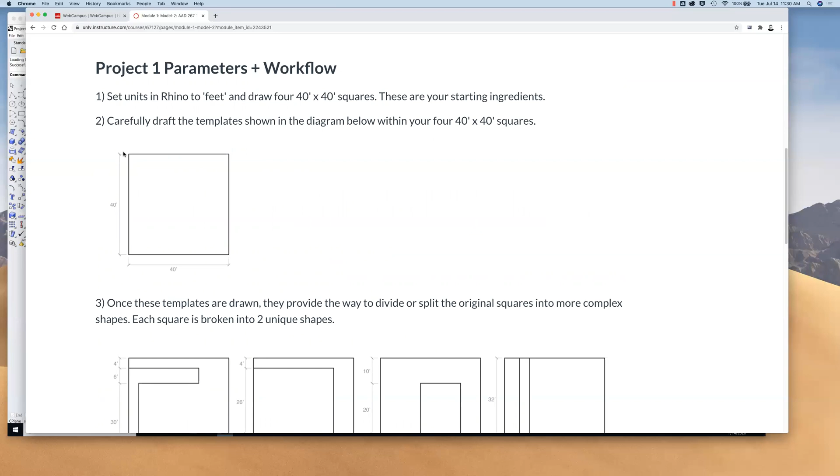First, you're going to set your units in Rhino to feet. You're going to draw 40 by 40 foot squares. Okay, so we'll start with 2 dimensions, so we'll start to draw things. You're going to take 4 of these 40 by 40 squares, and you're going to start to draw the stuff inside, right? Okay, and so you've provided these templates that you just need to sort of make something that's 4 feet in, and then goes, let's see, 32 feet this direction, and then 26 feet in that direction, okay? And on and on and on, right?

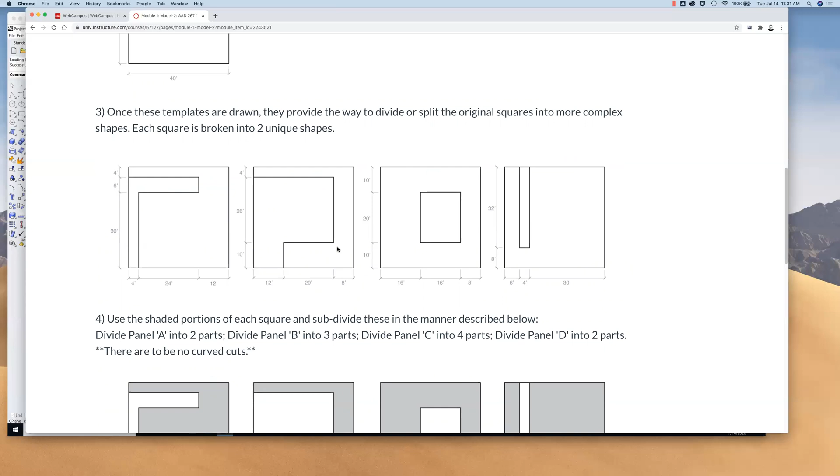What you're doing is you're taking something like a 40 foot by 40 foot square, and you're subdividing it into pieces. And then you're taking some of those pieces and further subdividing them. This piece gets cut into 2 additional pieces. This piece gets cut into 3. This piece gets into 4, okay? And on and on and on. Eventually, you end up with 15 unique parts, okay? A component catalog, so to say.

We will then extrude them into solids to give them thickness, so they're not paper thin. Let's say they're about a foot in depth. Then you can reassemble the parts in order to create a sort of spatial composition out of planes.

So there's a set of parameters here. You reassemble at least 12 of the components that you just drew and modeled, and arrange them within a 60 foot by 60 foot by 60 foot cubic envelope. So at least 3 edges need to be defined. You need to have some parts of one or more of these components go out to at least 3 of the edges of this imagined cube.

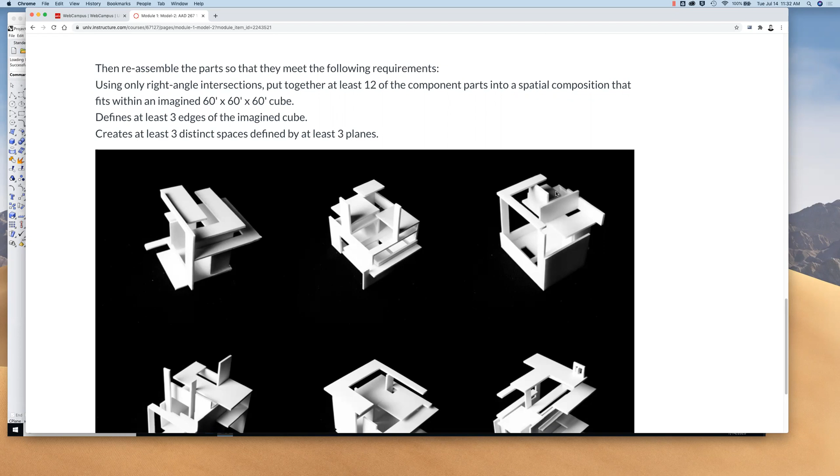And then you need to create at least 3 distinct spaces in this composition. That's easy - there's one here, one here, one here. What I hope you understand is that you don't necessarily need to create spaces by just making a closed room and then punching a hole through it for the door. You can begin to achieve spaces that flow into each other, understanding that there's an interlocking of spaces that can occur.

And if you have a variation in the set of volumes that are defined by these planar components, then you actually get some really interesting things that we'll cut in section and plan, and look at in perspective later on in the semester.

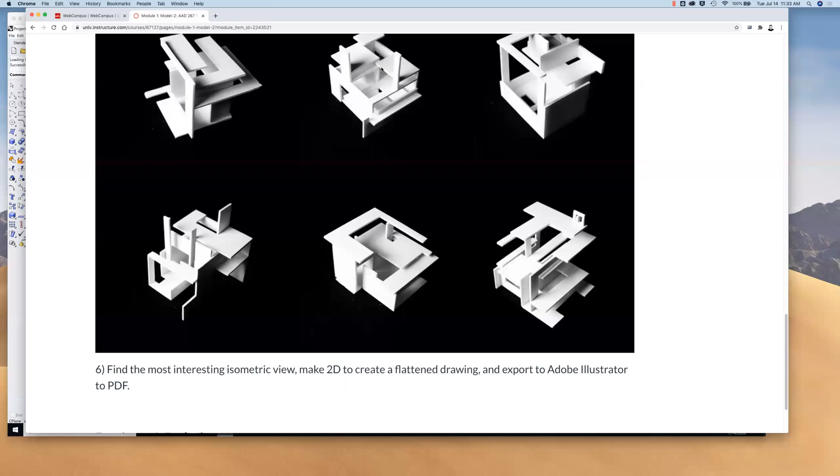So find the most interesting isometric view, then make it 2D and create a flattened drawing, and export to Illustrator to PDF. You'll be rotating this, looking around at it, and understanding what's the most interesting view that you're going to make an isometric drawing of.

Let's talk about quickly how we'll assess these - the criteria by which you can say, okay, I'm done, this is really successful, or maybe I need to work on this when I turn it in. We're talking about spatial variety: investigate and create a variety of volumes and interlocking spaces, which I just talked about.

So the interesting thing is, if you're looking at this and you say, okay, I don't just want a bunch of rooms, but I want a sort of set of interlocking volumes created by a set of interlocking planes.

Formal interest - the shape of things, the overall form created. Do not think in terms of front or back or top or bottom, but rather your model planar composition should be interesting from all sides. So if I took this digital model and turned it over and spun it around, it shouldn't be obvious which part's the bottom, which part's the back that I should never see.

Every side should be interesting. That might help you push, pull, arrange, slide, move, copy, or whatever, in order to continue to further compose these components into a system.

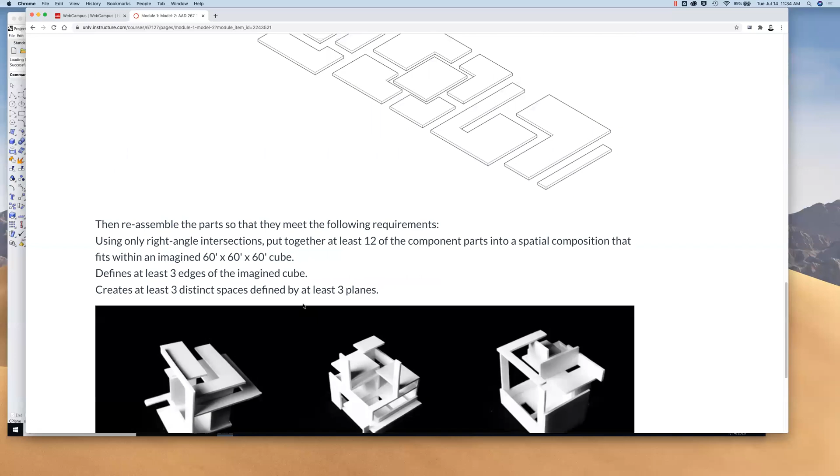And then last, simply following the instructions - making sure you read them carefully and that you follow them, that you meet the parameters, say the 60 by 60 by 60 cube. If this thing looks like a flat pancake and it's way outside of 60 by 60 feet, then clearly you didn't read very thoroughly. If it's just one big volume made on the outside, then again, that's not going to create 3 distinct spaces.

If you have curves, that's not part of the requirements - remember, it says here, no curved cuts. So look at these carefully. I try to break it down in a very reductive way, so you can just say step 1, step 2, step 3, step 4. Just follow the steps. The key thing is you don't necessarily have the end goal in mind, but the overall model emerges as you begin this exercise of how to compose planes in some sort of way.

So I have a question for Maria.

Will we have classes in person? Yes, most of the time we'll have classes - no, not in person, over Zoom. Campus isn't even open yet. So yeah, we'll be doing Zoom classes.

Did that answer your question, Maria? Is that what you were asking? Yeah, okay, great. Honestly, the last thing I want is to go into a classroom and touch a public computer that everybody else has touched, and those keyboards are petri dishes.

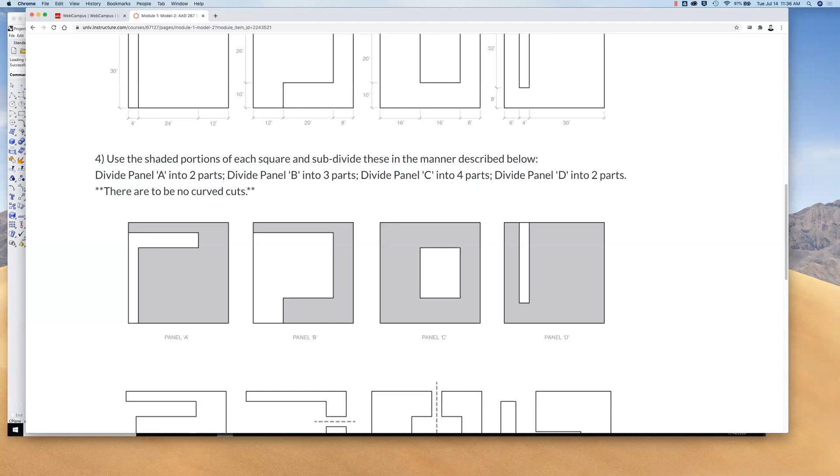I have a quick question. So in terms of drawing the shapes on the two-dimensional squares, are we drawing our own shapes with the respective dimensions, or can we draw it with our own dimensions?

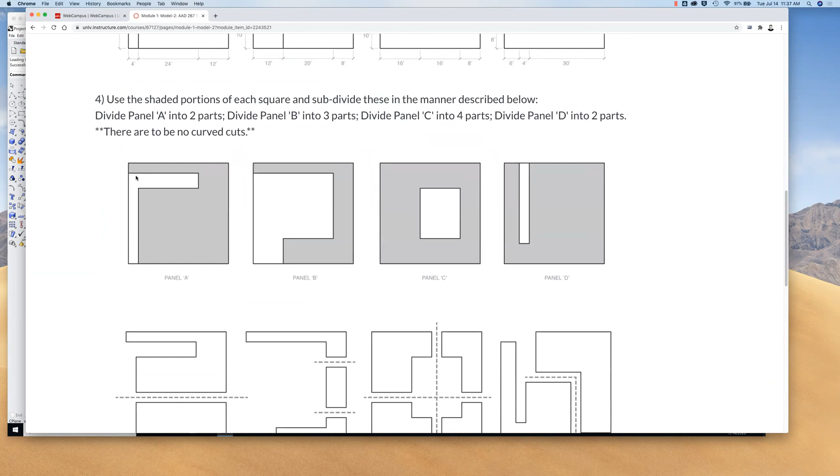You'll start by drawing, like in step 3, following these dimensions. So you'll have a set of shapes that look like this at the beginning of step 4. The shaded areas, then you can pick where you cut panel A into 2 additional pieces, where you cut panel B into 3 additional pieces.

So yes and no, right? No and then yes, I guess. Does that help? And what I'll do, sort of.

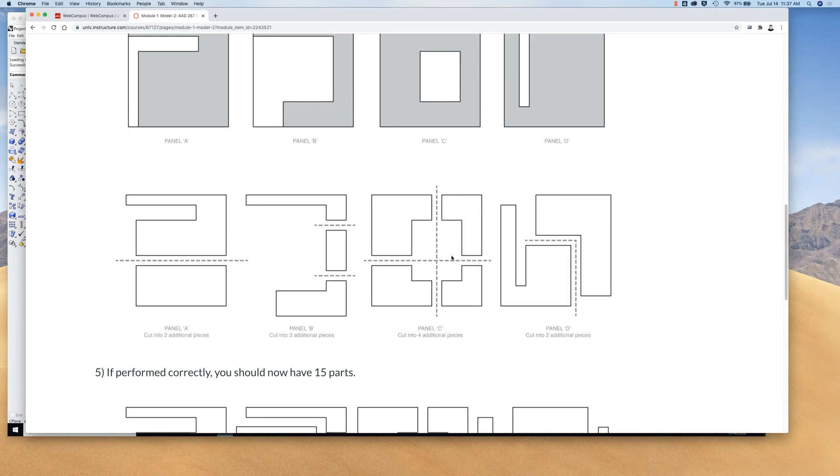Yeah, I mean, so we're basically making the shapes as you have them in the shaded version, correct? The very first step, okay.

Then the next step, where you cut them into 2 additional pieces, that's for you to decide where you would cut, right? It could be in this direction, or it could be here instead of down here.

Okay, thank you. Will the ISO be 30-30? Yes, the ISO will be 30-30. I'll actually show you in this demonstration how you set that in Rhino. There's a very particular way you do that.

So are we all going to have the same shapes and sizes? You'll all have these same shapes here, and then you'll choose where you cut 2, 3, 4, 2 additional pieces. So your overall component catalog might look a little different, although you're all starting with the same sort of language, right? These are all results from the same steps you're doing up here.

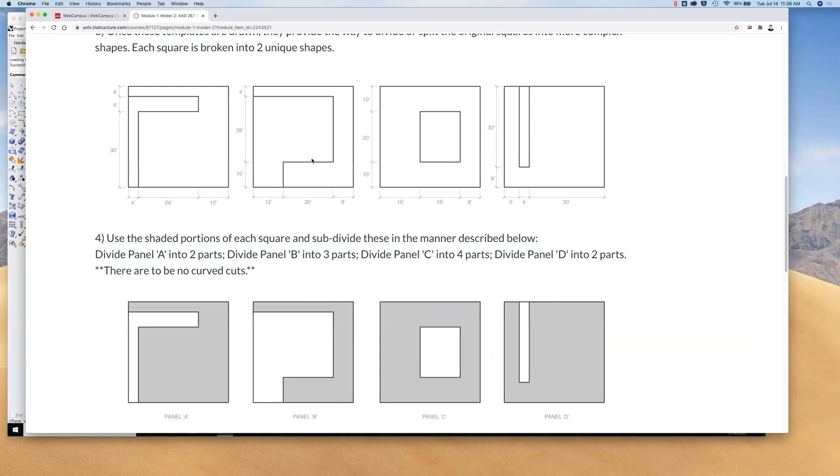They're all different, although they all have a similarity in the language used, and that they're planar shapes. Everything's orthogonal, everything's cut to 90 degrees, everything's put together in 90-degree increments. So there's a similarity, and yet each one is unique. You can think of it in that way.

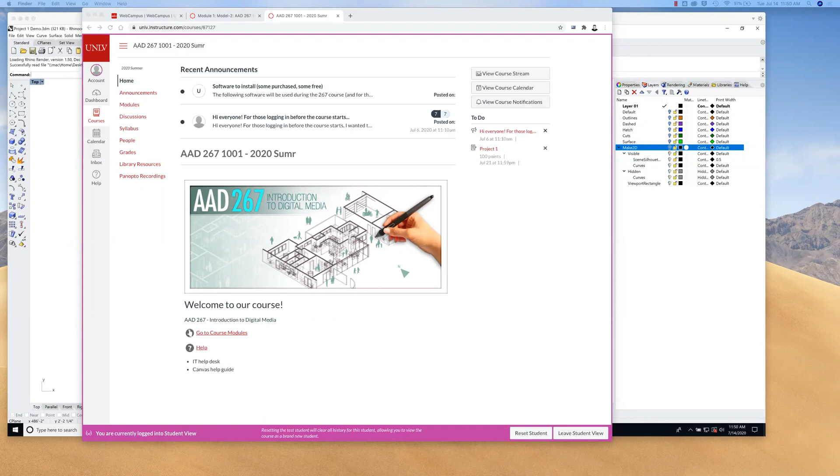Any other questions before we move on to Rhino? Oh, yeah, okay. So yeah. I just have one question.

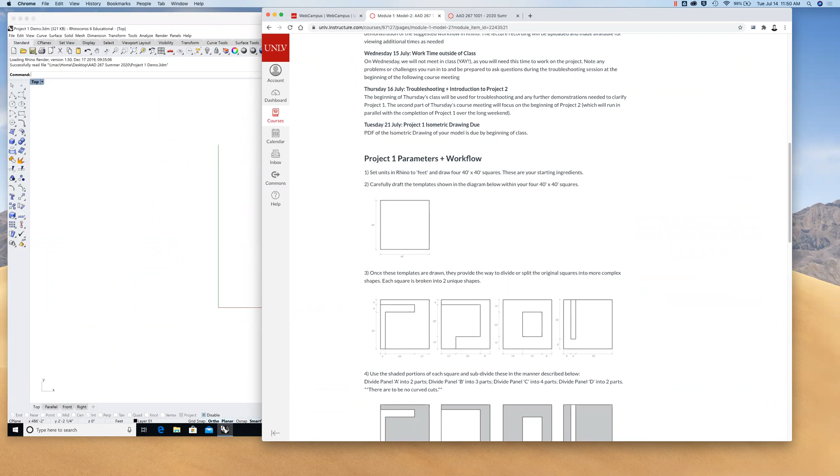Okay, so we'll just go through this step by step. First thing, Rhino, I'm just opening this up. Yours might look different. I've set my background to be white instead of the gray. I've turned the grid off because I don't like it. It's visually distracting, particularly when I'm trying to show things on the screen. But all in all, this should be the exact same.

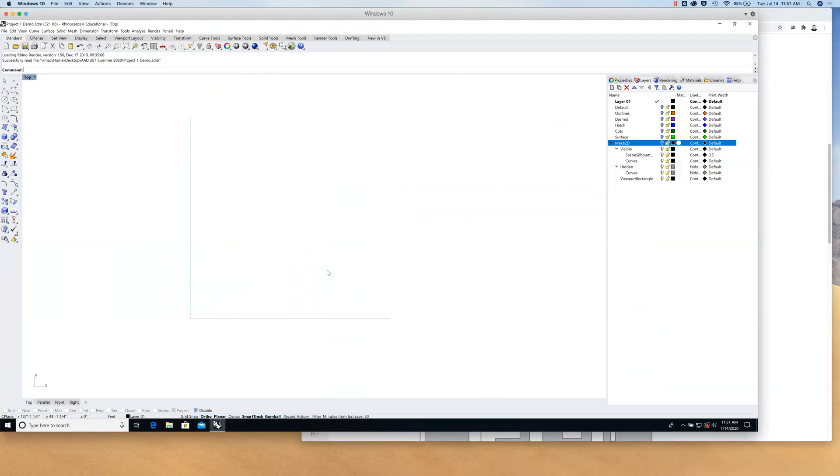So one thing we need to do is set our units. That's something you just need to get in the habit of doing, so that's the first thing we're going to do. We're going to go to some of the settings. This is where most of Rhino's settings are if you're using the Windows version. You go to Tools, pull down, and go to Options down at the bottom of that pull down. Okay, leave my cursor there for a moment. If you write something down, the settings are Tools, pull down, Options.

And that'll bring up a settings box, and there's lots of things in here. Here's how I turned off my grid: I went to the grid settings and unchecked show grid lines. And on and on and on. But what I can do is go to units, and make sure those are set to feet.

Also with distance display, you can do decimal if you prefer. I prefer feet and inches. Sometimes I want to say, hey, this is going to be 8 foot 4 inches. I don't want to say 8 foot 0.33 feet or something like that, that would just be weird. In the imperial system, things aren't necessarily always divisible by 12 really easily in my head, so feet and inches work well. So this is what I'm using right now: feet, and for distance display, feet and inches.

I'm hitting OK. So we've set units. That's really important—we typically draw and model things at full scale. Then if we need to extract, let's say, an 8 scale drawing, we can extract it and make sure it's scaled correctly. Typically, we just draw something that's 40 feet, drawing it at full scale in the modeling space itself.

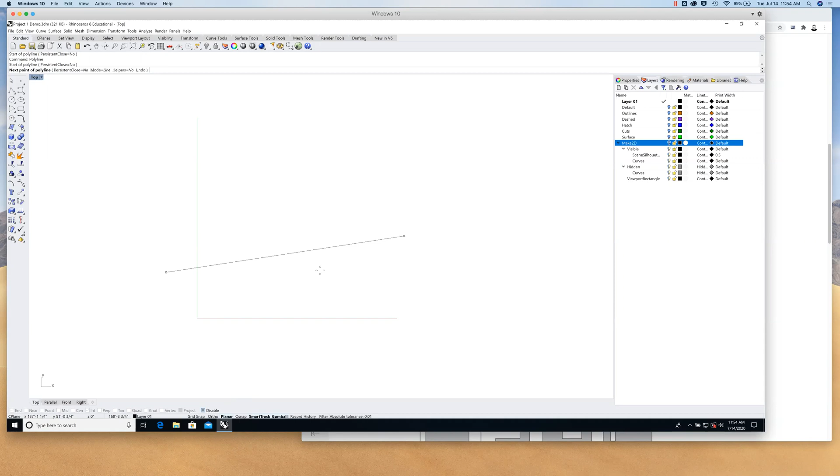I'm just going to start by clicking on a point. Let's draw a line—a 40-foot long line. Now it wants me to draw the end, or click on the end point. I can actually type in 40 and then the tick mark for feet. Now it's only going to let me draw a 40-foot line.

Now I want to actually just draw in the x-axis. I want to constrain these to 90-degree increments, so I can turn on ortho down here at the bottom. There are a couple of options I can toggle on and off, and one of them is ortho. What happens when I toggle ortho on? I can only draw on the x or y axis. Okay, so I can click.

Now I have a 40-foot line going from left to right. Now it's asking which direction I want to draw. I can click my mouse button, or type in 40 with a tick mark for feet. Now I'm going to draw another 40-foot line—I just have to tell it which direction. I'm entering 40 feet into the command line, hitting enter. Now I can only draw a 40-foot line; it's just a matter of clicking which direction I want.

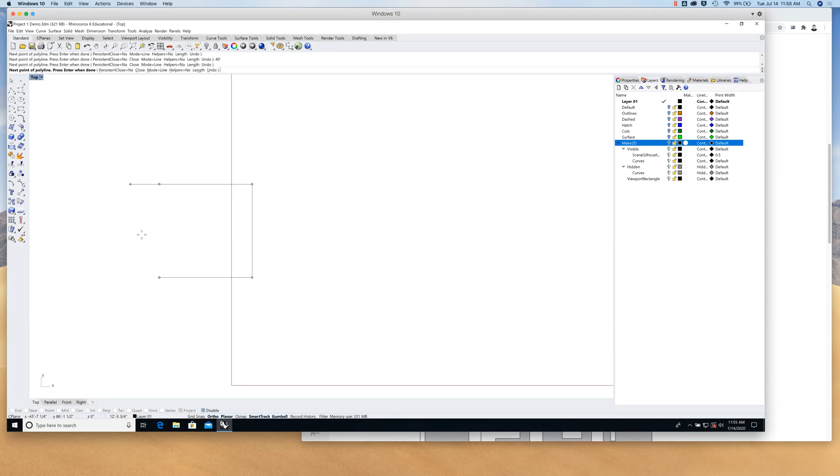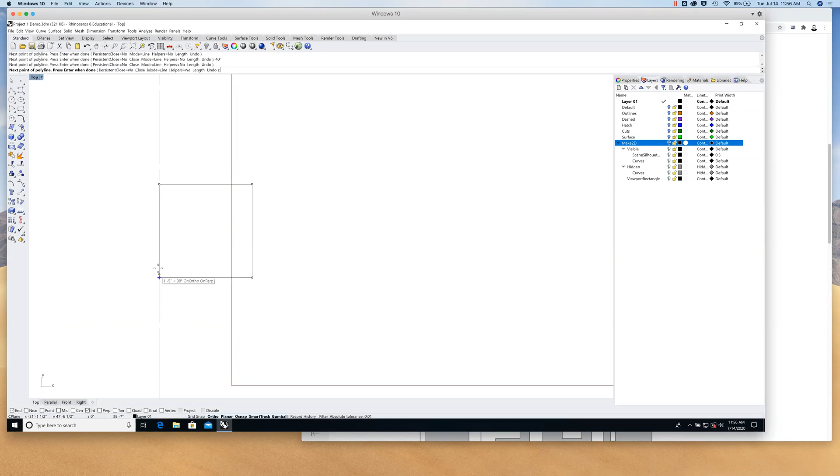Now I could type in 40 feet and just click down, or let's say I just want to make sure I click directly on that starting point—I'm going to turn on my object snaps. That's another option down there at the bottom. So I've toggled on ortho, so I can only draw in 90-degree increments, and now I've also toggled on object snaps, so I can make sure I snap to endpoints. Now when I get close to that endpoint, it'll snap to it and I can click and close the shape. So I'm going to draw another 40-foot box—I'll start again.

Polyline, start point. Remember, if I don't have my ortho on, I can draw in any direction I want. I'm going to turn my ortho on since I'm just drawing squares. I'll type in 40 feet into the command line using my keyboard, hit enter, click when I want to place that endpoint. 40 feet, click, 40 feet, click, snap back to the start point.

Now, you'll do this over and over again a couple of times in order to practice and develop the muscle memory. What you'll find is that when you right-click, it's like hitting the enter button. When you right-click and you don't have a command going, it repeats the last command, which is really handy. So let's say I want to draw another polyline.

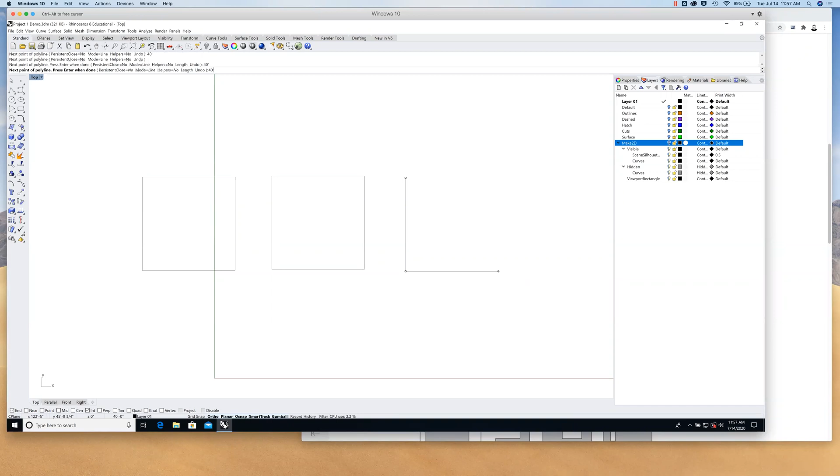I just right-click again. I don't have to go all the way back to this toolbar button. Right-click again, 40 feet, click, 40 feet, click, 40 feet, click, snap to that endpoint, click. Right-click to start again.

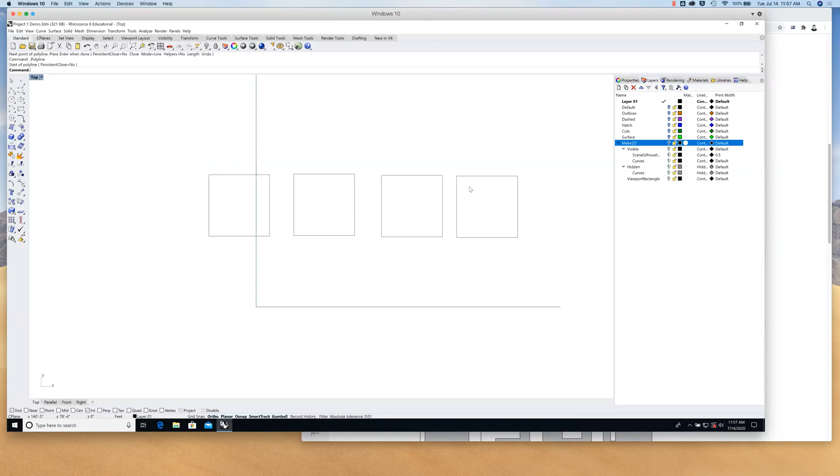40 feet. So it just takes practice, practice, practice, practice. And you eventually develop a muscle memory. You don't even realize half the things you're doing. It's like driving, right? Your feet move, your arms move. You don't really have to think too hard about it once you have a little bit of practice at it.

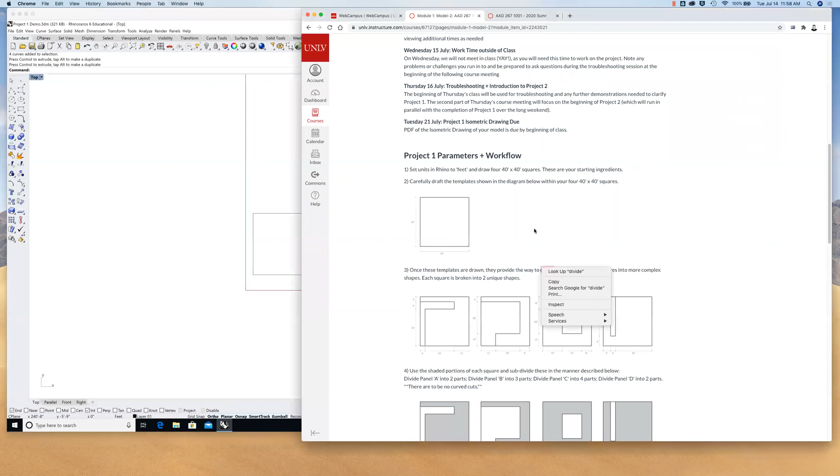So I have 4 starting ingredients, these 40-foot by 40-foot boxes. I'm just going to move them down here. Okay, next steps. I'll just zoom in here.

Draw these templates inside, right? So I need to make sure that I actually have these shapes, and I want both the inside and the outside shapes. That's important to remember. So let's see, I'm going to drag this over so I can see it, hopefully.

There we go. There's that first shape. I'm going to drag this and size it a little differently so I can see what I'm drawing over here and the dimensions that I need, and what I'm drawing here in Rhino. So I have an edge here that starts at 4 feet down from the top. It's going to be 6 feet thick, and then 4 feet thick as it goes down all the way to the bottom.

So there's a couple of different ways you can approach this. One way is to start to draw, let's say I'm going to draw this shape. I'm going to start down here and snap to that bottom corner, because that's an endpoint. And I'm just going to draw upwards.

And I'm going to draw a 36 foot line, so 30 plus 6, to get to there. And click. Then I need to draw, let's see, 4 feet plus 24 feet, that's 28 feet. So 28, tick mark for feet, there we are, click. Then I know that this is 6 feet, so I'll type in 6 feet.

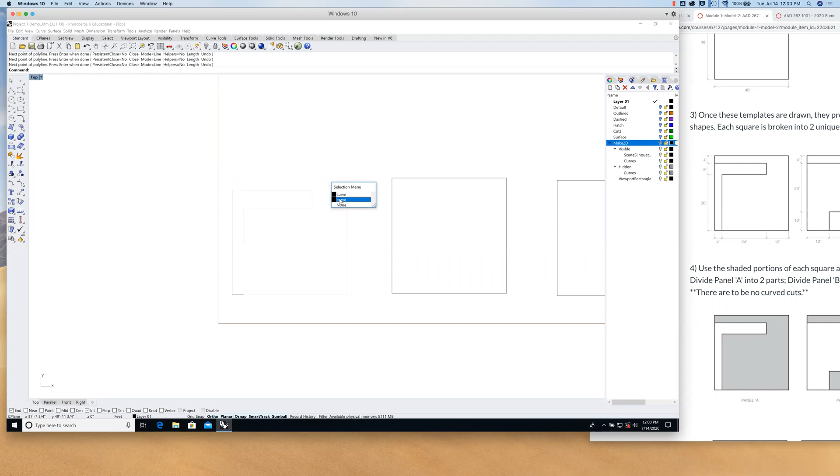Now, what's interesting is I have 2 shapes here. I have the original square, and I have just that new shape that I made. And so when I click on something and Rhino is not quite sure what I'm trying to select because 2 things are close together or overlapping, it gives me this selection menu option. So I'm going to select this first curve and go ahead and delete it. Now I'll just pull this away.

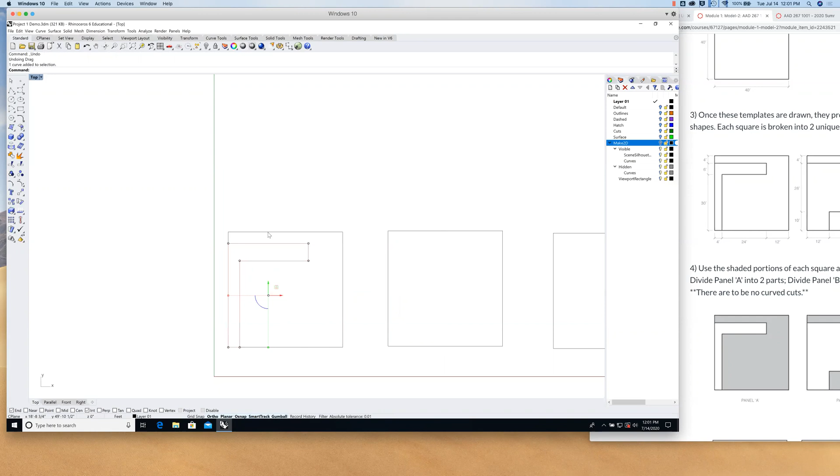I have both of these shapes, right? I have this one and this one. I'm going to go ahead and move them back so that they're together again. But I have this shape, and I have this shape now, okay? So let's try that again. This is a demonstration. You'll continue to rewatch this if you need to.

So I need to basically take this dumb box and make this shape out of it, sort of a backward C shape. I'm going to start here at this top left corner. So I'm going to go ahead and draw a new polyline. I'll snap to that top left corner. You can see that there's different snap points you can use, like intersections, center points, or midpoints.

I'm going to turn intersect off. I'm just going to leave endpoints on. I'm going to go ahead and snap to the end, and go to the edge here and all the way to this corner. Now I know that this is going to be 8 feet plus 20 feet, so 28 feet. So I'm going to go ahead and type in 28.

Okay, and then 10 feet up, so 10, right, and 20 feet. Once you get the hang of this, hopefully it's not too bad. Actually, it comes quite fast and easy, that's the hope anyway. So this will be 20 feet plus 12 feet, so 32 feet. And then close it up, right? So there's the first shape.

I can just go back and quickly, it's quicker than trimming all this stuff out. I can just go ahead and make the other shape here. Everything's already drawn for me, so I just snap to the right places and call it a day. I'm just gonna delete that original outside box, I don't need it anymore. It's almost just like construction geometry. I would just erase it if I was doing this with a drafting table and a square.

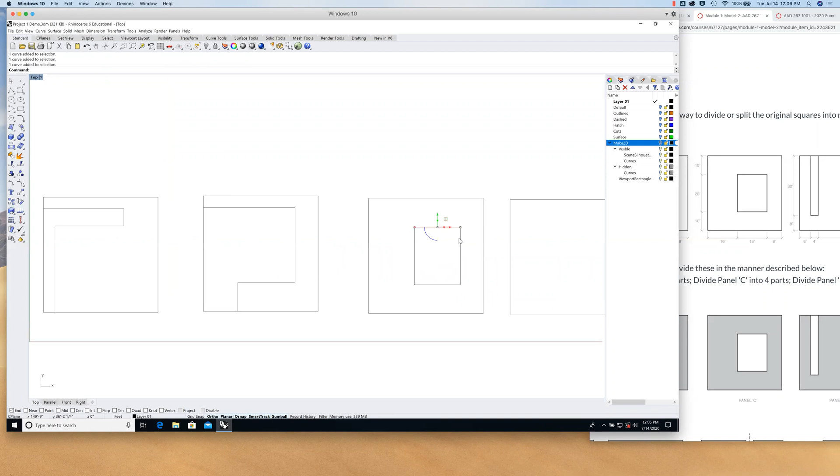The other thing is that these are now 4 distinct lines, they're not a polyline. You remember when we were drawing a polyline and we close it up, I can select one edge and it selects the whole shape. Here, when I select one of the sides, it doesn't, it just selects one of the sides at a time. What I need to do is join this together into a closed polyline, a closed poly shape. I can select them all at once, and then to join them together, I just type in the join command.

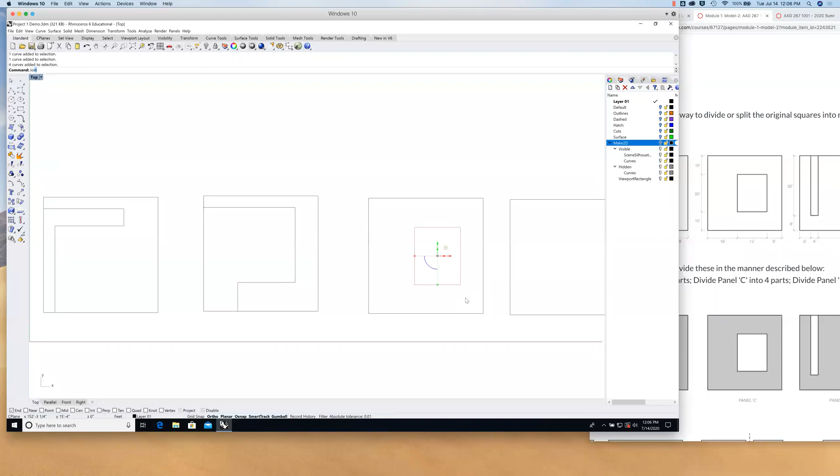So type in join, and the command tells me 4 curves have been joined into one closed curve. That's helpful to know. Let me undo again. If I type in join, or just select one of these toolbar buttons to run a command, it's going to ask me for the ingredients—for instance, select objects to join. It needs some curves to join, so I select these. Once I'm done, it says 4 curves joined into one closed curve. That's just us accomplishing something.

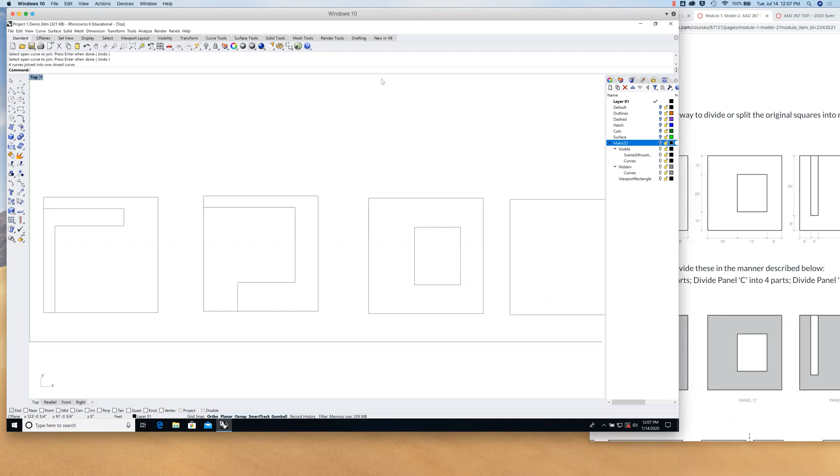All right, let's see. Last but not least, let's quickly do this one. Again, I'm just following this template exactly, and that's why I put these dimensions on for you so you can follow them exactly.

I'm just going to draw this shape, the U, and then I'll be able to draw this box really quickly. So I'll start at this top left corner and go all the way around, then make this 30 feet long, 32 feet tall, 4 feet over. I have my ortho on, so I can draw only in 90-degree increments. 32 feet back up, then snap right there.

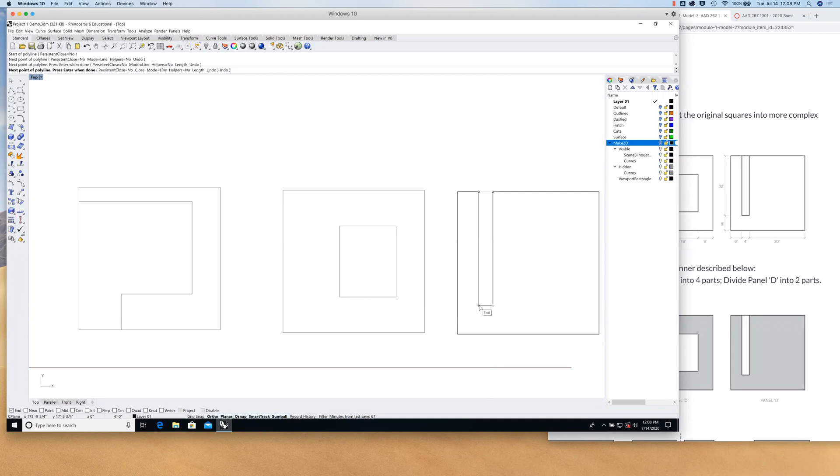Okay, and I can delete that original outline polyline. I just click, click, click, click to make that smaller shape. All right, see, now I have that shape versus this shape. Okay, great.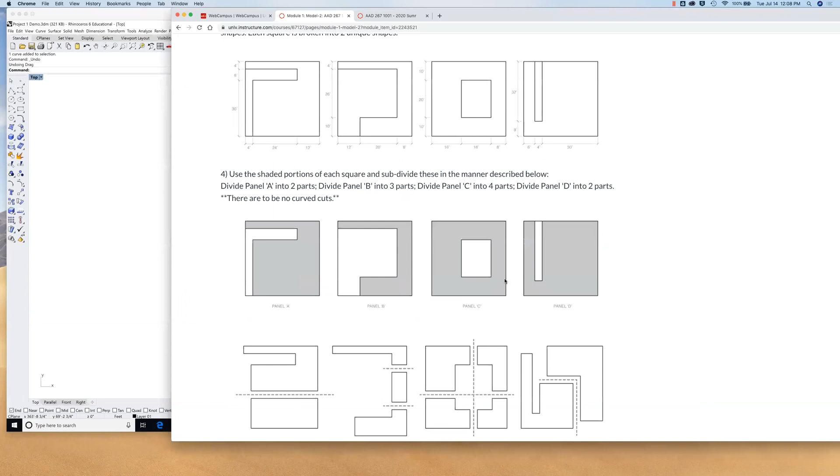Now it's time to move on to the next step. I'm just going to expand this window. Some of you might be following along and actually be close to being done—who knows, I don't know. But I did want to go through this step by step with you guys. In particular, I want to make this as productive as possible so you can hopefully get as far along as you can by tomorrow.

So panel A, cut into 2 pieces. Panel B, cut into 3 additional pieces, 4, 5. What I need to do is take some of these pieces and start to trim and cut them up in different ways—splitting them up and things like that.

How did you delete the original outline? I selected it and just hit my delete or backspace key. So you select something, then hit the delete key—on my Mac keyboard. On a PC keyboard, you might have a delete button that's different than the backspace button. But you just use the keyboard to delete.

Good question. Once you have both shapes—let me just draw that outline so we have it—you have this shape I made plus the outline, and when I try to click one versus the other, it's going to ask me which one I want. So just make sure you're selecting the right one to delete away.

Are there keyboard shortcuts for the commands? Yes and no. You can actually program those in the settings, like AutoCAD, like C for copy and TR for trim. What it does is IntelliSense in the command line—as I start typing poly, like POL, it says polyline, polygon, poly. It remembers what you've used most recently, so it'll guess polyline first. If you start typing trim, it'll guess trim. If you type CO for copy, it'll guess copy first. So yes and no.

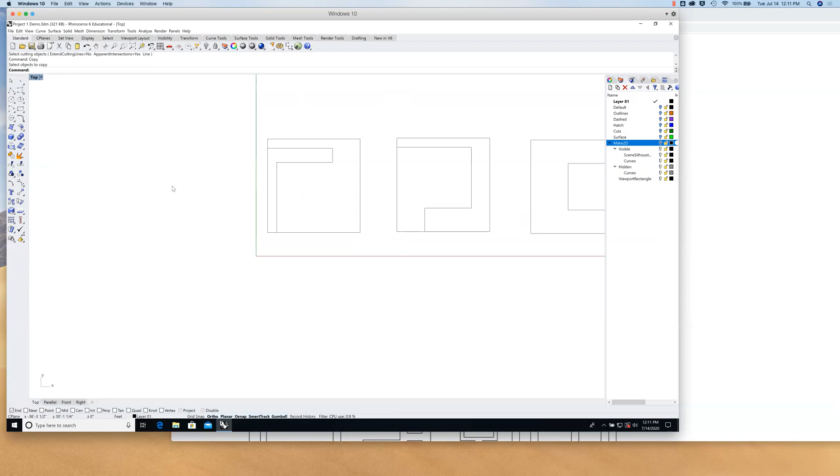There are ways to set more keyboard shortcuts, particularly if you're used to AutoCAD, like I used to a long time ago. So thanks, I hope that's helpful. Those are good questions—you guys have great questions, so keep them up. I'd much rather answer smart questions than just sit here and listen to myself all day. But needless to say, we need to move on.

One of the things I'm going to do is make a copy of these, and start trimming the copies just in case I need to take back a step if I mess something up—does that make sense? I try to do that when I'm thinking about it and remember. So I'm going to type in copy. How do you pan and zoom? Oh, excellent question, Miles.

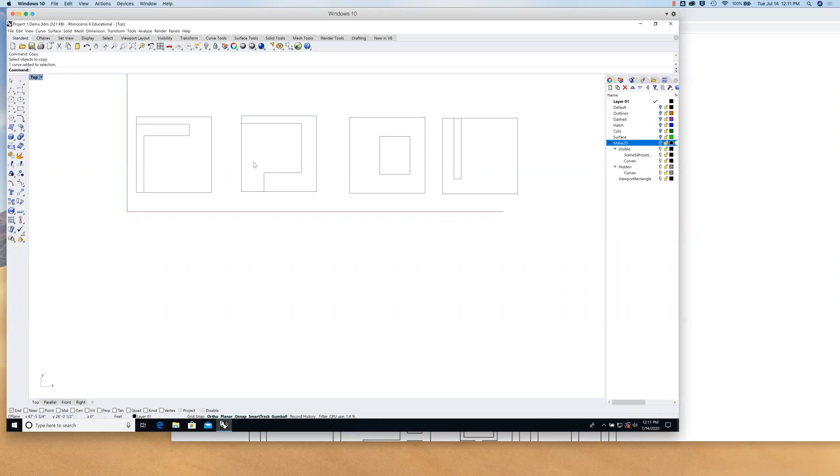Okay, so if you have a 2-button mouse, like a left and right click, when you're in the orthogonal views, the right click pans. And then if you have a scroll button, you can zoom in and out with it.

Now, there are other ways you can just use that right mouse button. If I hold down the shift key and use the right mouse button, it still pans. If I hold down the control key and use the right mouse button, I can zoom in and out if I don't have a middle mouse button or a scroll button.

So there we go. In the perspective or parallel or other three-dimensional views, I'll just turn this to perspective real quick.

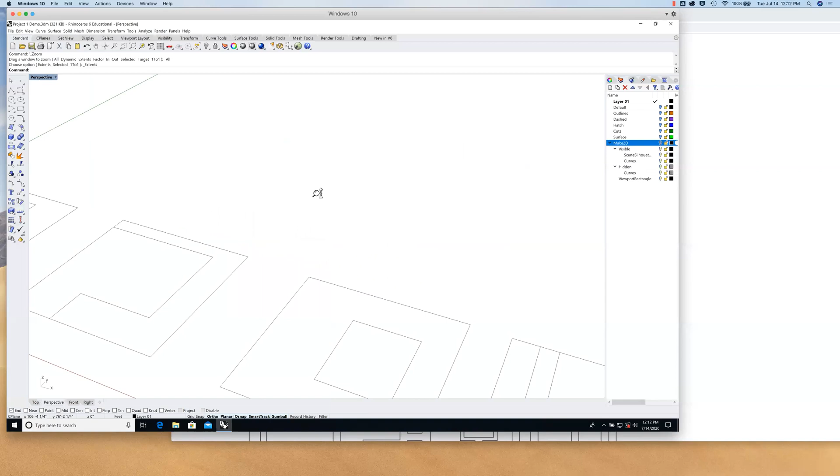In those viewports, when I right-click, I tumble, dolly, or rotate my view. If I hold down the shift key and right-click, then it pans. And again, if I hold down control and right-click, it zooms in and out. So that's a really great question.

I'm not going to pretend it's the most intuitive thing. I came from a time where sometimes we did things in DOS, so this reminds me a lot of how Maya works, back before Rhino became a really inexpensive Maya alternative. But with a little muscle memory, you begin to remember without really thinking about it. That's a great question.

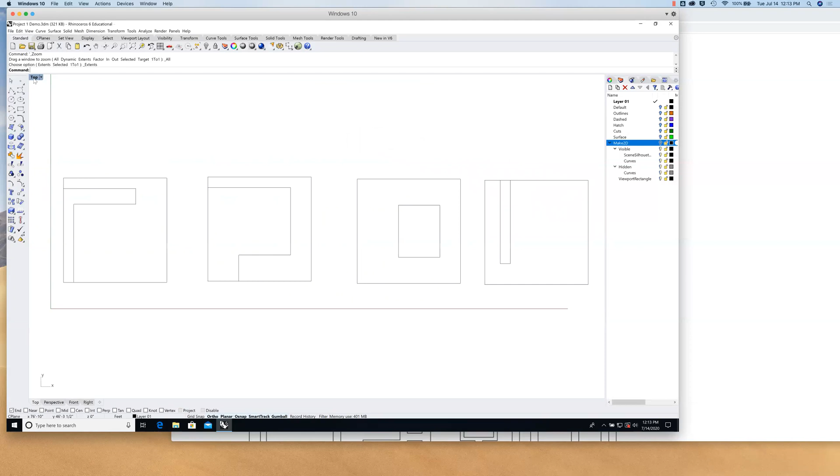So I'm using right click to zoom, and what I'm doing is toggling back and forth between viewports. If I want to maximize one of my viewports, I double click on the label. When I want to go back to 4 viewports, I double click on the label again, and I can look at a different one, double click it.

If I start to move things, let's say I have something in plan view or top view and I want to move it in elevation, I can move it in side view and see it move all at the same time in all my viewports.

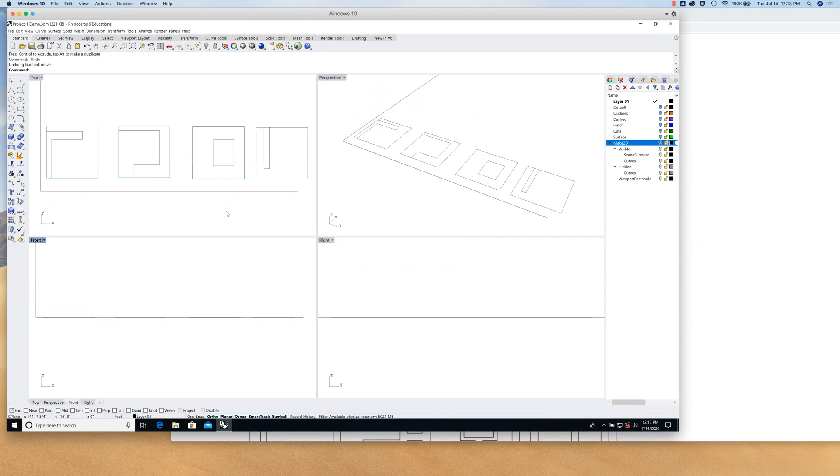I'm not going to move anything at the moment. But back to the task at hand, I am going to make a copy of these before I start to split things up, right? That's really important, so I'm going to type in copy. I'm trying all of this stuff from scratch and brand new, so before I start to trim and potentially do something destructive, I'm going to make a copy in case I need to go back to the originals.

I'll go ahead and take these smaller shapes. I'm just going to divide these things up. So I divide this one up 2 times, divide this one up 3 times, this one up 4 times, this one up 2 times. Okay, so one of the first things I'm going to do is just draw some polylines or some lines.

I'm just going to make a judgment call on where I'm going to cut these. I'll cut one there, and one here. So I'll use this to cut this into 1, 2, 3 pieces, this one into 1, 2 pieces, this one into... well, let's see, yeah, maybe I'll cut this one here too. So 1, 2, 3, 4 pieces, and then this one into 2. I'll just do something like this.

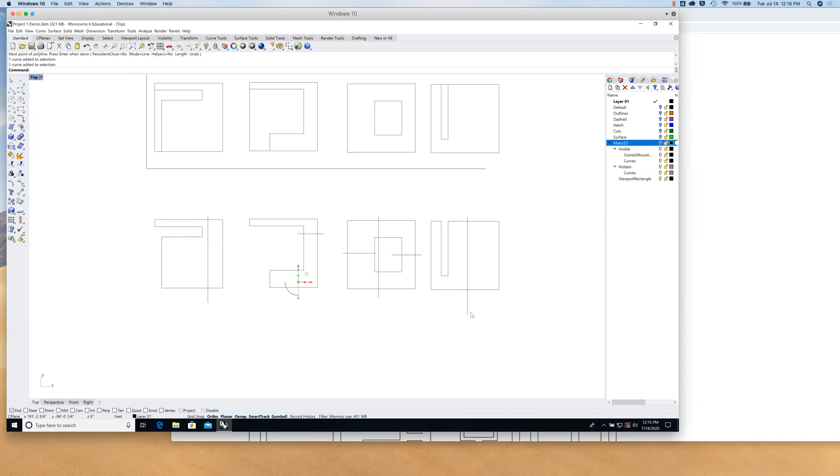So what I'm going to do is use these to split these objects up. That's key, another keyword: split. Again, when I post this to YouTube, I'll go through and try to time code all of these for you, so you're like, okay, how did he do this? You can look at the comments and see that he did split at 23 minutes and 26 seconds in, just click on it and it'll take you right there.

But I'm just going to type in the command split. It says select the object to split, so I'll select this outline and right click once I'm done, then it says select the cutting object. So I'll select this line that I just drew, and this curve has now been split into 2.

I can go ahead and delete that split cutter line that I made. And I'm just going to make a polyline, snapping to close these back up.

Okay, and then again, I want to make sure that these are all closed. Right now I have this edge. I can select all these at once and hit join, or type in join. It says 4 curves are joined into 2 closed curves. So it did all of this at once, closing all of these up into closed curves, just with one command.

So I'm gonna do that again, split. I'll select this object and split this thing, using these to split it up. I'll go ahead and get rid of these objects, just move these away so I can prove that they were actually split. Now I know exactly where I need to close up those seams.

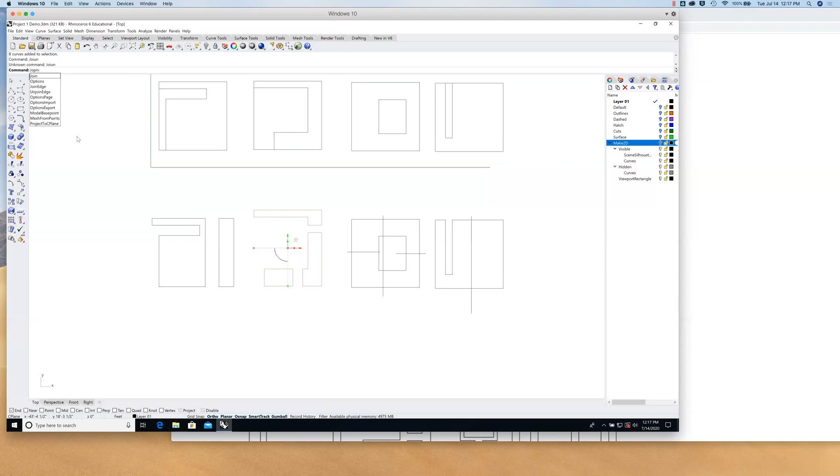I'll select all of these at once and hit join, or type in join. Try to spell join correctly. Oh really, there we go. 8 curves joined into 3 closed curves. So it closed all of these up, each of these now are closed curves.

Okay, one more time, split. I'm gonna split both of these with all of these. I'll go ahead and just delete these things, and move these away. You'll notice sometimes when I just select things, the gumball pops up, and if I'm feeling very adventurous, I can just move things without any precision with the gumball tool, those arrows that pop up.

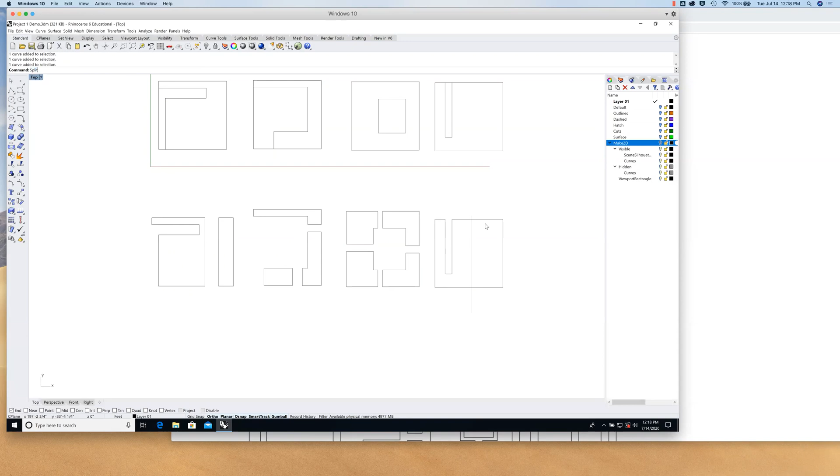Okay, one last time, I'll do another split. Select this to split it with. Go ahead and delete that splitting part. Just move this away with gumball so you can see it. Now close these up with some line segments, and then make sure that they're joined together. Type in join. Closed curves, okay, alright.

And now I deleted these other shorter, smaller pieces away, but I need to select those and make a copy of them down here along with them. So now here are my component parts, these are what I'm going to actually use. 1, 2, 3, 4, 5, 6, 7, 8, 9, 10, 11, 12, 13, 14, 15. There should be 15 of them, and voila, there are. So there's my 15 parts.

So that's drawing with measurements, using the ortho, using the object snaps, using some trimming and splitting, using some joining, doing some moves and some copies. It's a lot to absorb if this is the very first time you've done this stuff. I understand that, that's why I'm recording this, so you can go back through and rewatch it and then do it on your own step by step, watch and pause and then do it yourself, and keep watching and pausing and doing it yourself. You can sort of do this incrementally on your own tomorrow.

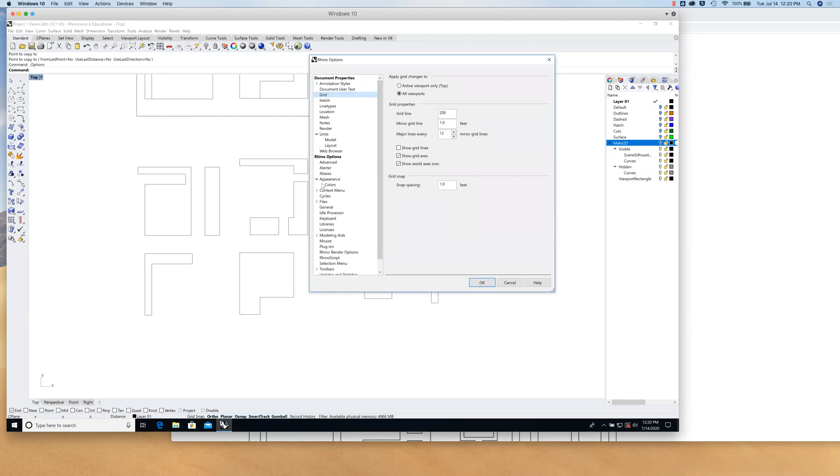Oh yeah, okay, back to the tools options, right? You'll find pretty much every option for Rhino, there's more here than you can shake a stick at, in the tools pull down options. Just like where we set the units, you can go to grid and turn the grid off if you want. There it is on, there it is off. Let's see, appearance maybe, colors. There's background color, so you can change the background color. You can change the selection color. Right now I have that set to red, so when I select things they turn red. Yours might be yellow against a gray background. It's up to you. What you're looking for is contrast, depending on how you're drawing and what you're selecting versus the background color.

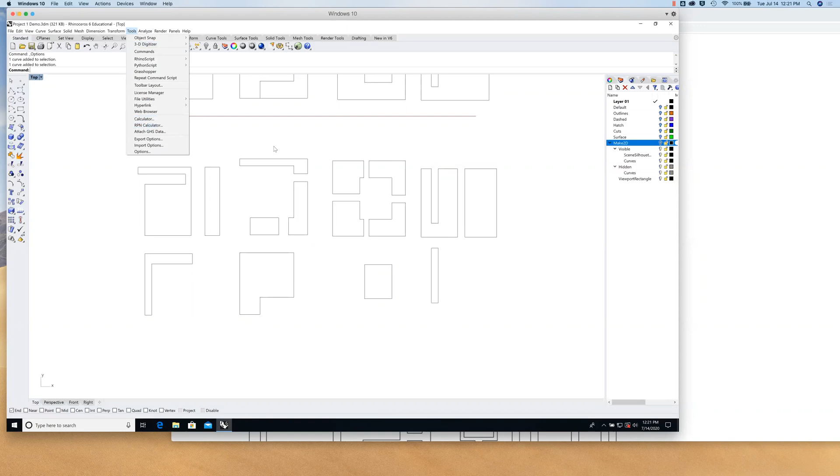Tools, pull down, options. How would you unclose an object? Let's say this is a closed object, a joined object. How do I unclose it? I can explode it. Just like there's a join command with two puzzle pieces joined together, there's something that looks like an explosion - that's the explode command.

Let me actually type it in without the typo. I explode it, and I can select this, and now it's exploded into its own pieces - each edge of the polyline is now its own separate line segment. So just like there's a join, there's an explode. Those are the two opposites.

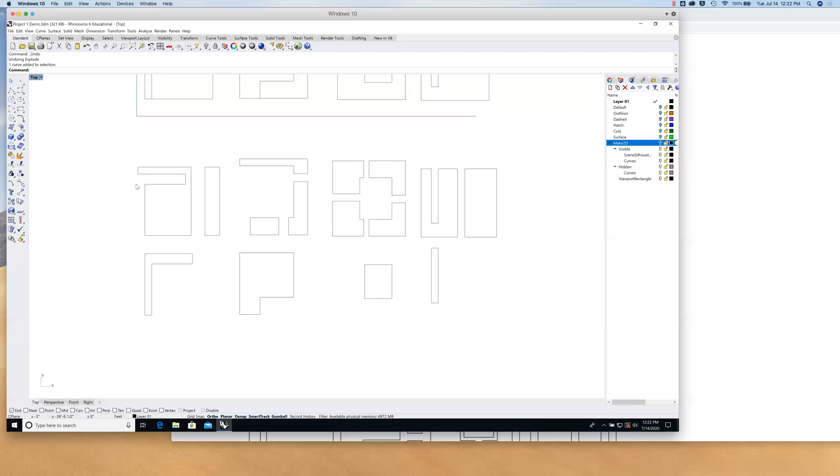Should we be making our shape 60 feet? No. What you want to imagine is a 60 foot by 60 foot by 60 foot cube that you're working within, and yeah, I would actually model that - I'll show you how in just a minute. You're skipping ahead, but that's a great question.

First of all, what we need to do - these are just curves, just lines, like polylines. We need to actually make these into surfaces and then give them some thickness. Then we need to model that 60 foot by 60 foot by 60 foot cubic envelope that we're going to work within. The last step is to move and rotate things and compose them inside that 60 foot volume.

We're only supposed to split the outer portion of the square and leave the inner shape intact. Yes, exactly. You'll see that you really only split the shaded portions here. You still keep these inside portions, the unshaded portions - those are still pieces that you use as well. You can see them here and here, and this one, and I think this one, right?

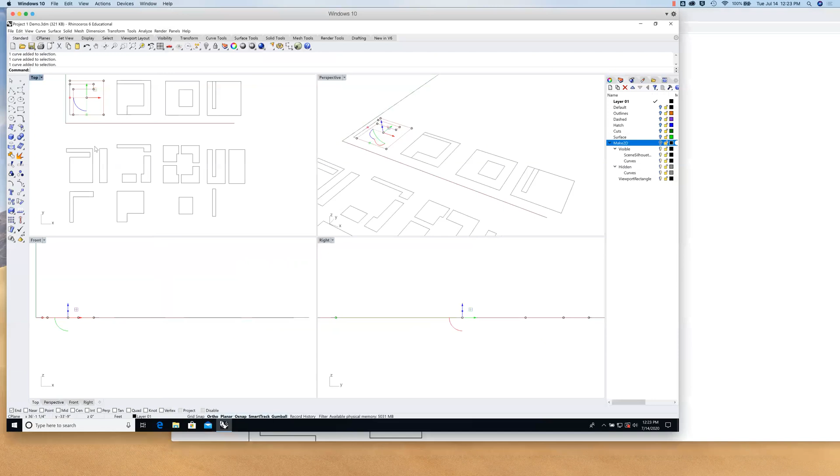So when it comes to splitting things up further, you just look at the shaded ones, but you keep these unshaded ones. That's why I made a copy of those down here as well. These are all of my components that I have at my disposal. There should be 15 of them. You have to use a minimum of 12.

All right, you guys ready? Let's surface these bad boys. So I'm in perspective view - actually, I'm showing all of them at the same time. But in perspective viewport, I don't know if you noticed this, right?

You can right click or just click on the little arrow next to each viewport label and you get another menu. Some of these are probably on wireframe mode and some of these are maybe on shaded mode. So in perspective view, I'm gonna turn mine to shaded mode - I'm just looking at the viewport label where it says perspective versus top or front or right, and in the resulting menu, I'm gonna select shaded.

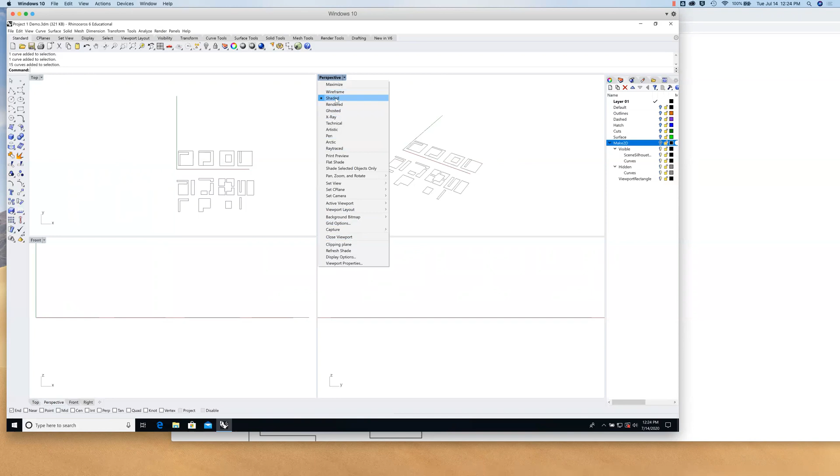What happens is when I start having surfaces or other kinds of surface geometry in my model, it'll actually be shaded so I'll be able to see it. So with that said, I want to surface these things. I'm going to go into perspective view - I just double clicked on that viewport label to maximize just the perspective viewport for the time being. And I'm going to bring up a couple of things.

There's several different ways you can - how do you say - surface these. Probably the quickest way is to use the extrude command. I'm gonna type in extrude and just watch. It's gonna say extrude curve, select this curve to extrude. I'm going to select this one, select it and right click to enter when I'm done. Then it's going to pick a direction - by default, I think it's going to be the z-axis since these are drawn on the xy plane.

I have a number of parameters here I can adjust, including the extrusion distance. I can visually move my cursor and click where I want it, or I can type in a distance, like 1 foot, which is the actual distance I want you guys to use in this case.

If both sides are selected, they'll extrude in both directions, but I just want to do it on one side, so I'm going to click on this option. See how I'm clicking on these options in the command line? They actually look like hyperlinks.

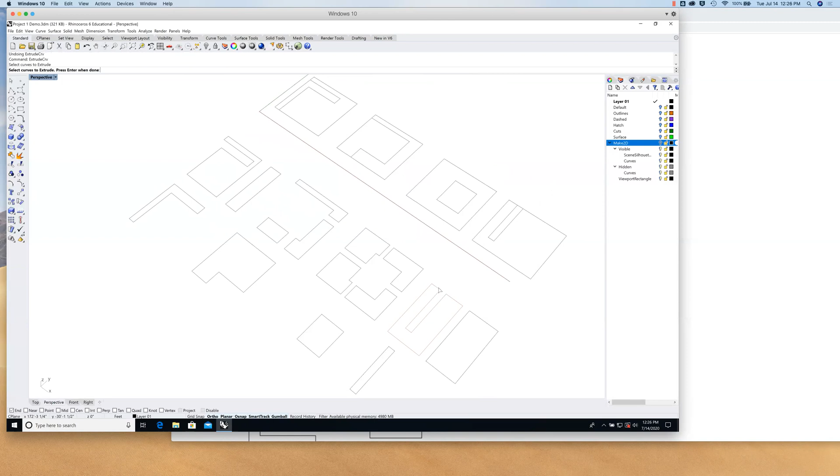When I roll over them, they recolor to blue. Solid, yes. If solid is set to no, I'm just going to extrude the sides and I'll be able to see inside. I'll just go back to extrude, and I'm going to toggle solid to yes.

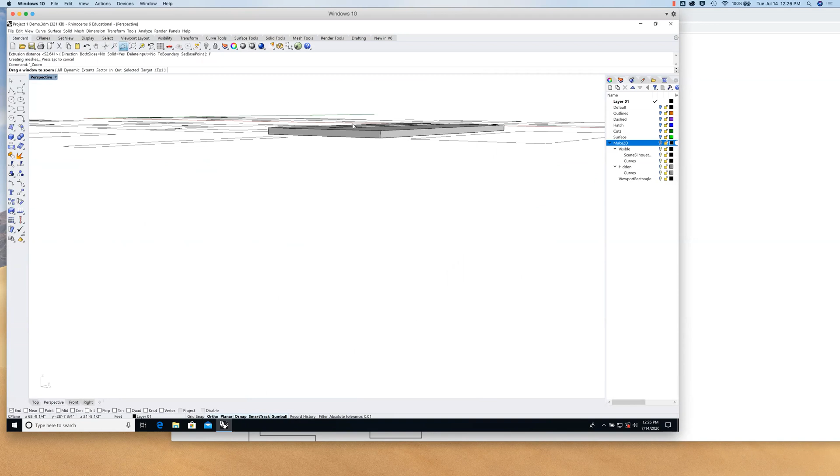For extrusion distance, I'm just going to type in 1 and the tick mark for foot, and it's going to extrude 1 foot. Right now I have a solid shape. So now it actually looks like it could be a hypothetical wall, floor, or ceiling, something with a little bit of mass to it.

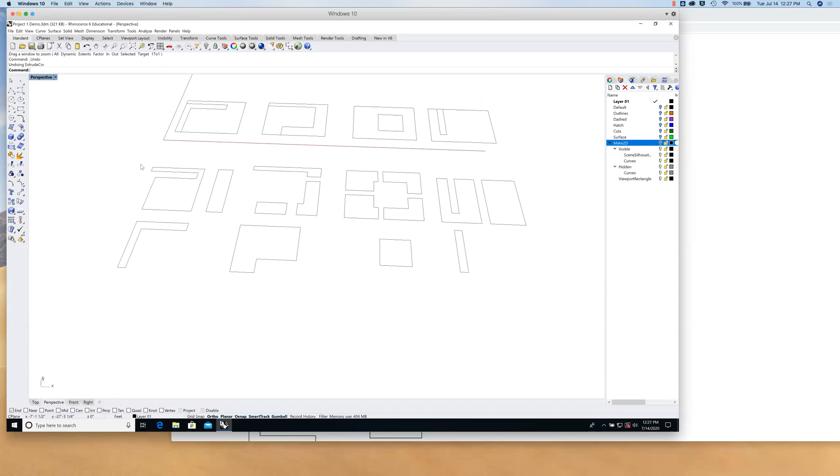Now, I don't have to do this one at a time. I can do this all at the same time, which is kind of handy. I can say extrude and select all the curves I want to extrude at once. I'll drag from left to right and make sure I select everything, looking for that highlighted color to confirm.

I'm going to make sure solid is set to yes, both sides is set to no, and I'm going to move it so it extrudes upwards. I'll type in the distance, 1 and the tick mark for feet, and hit enter, and now everything's extruded all at once.

So now I have 3-dimensional surface-based components to move around and manipulate. So what happens when you explode a solid? Great question, Isaac. Right now this is a set of surfaces joined together into one closed polysurface.

If I explode it, then all of the individual edges and sides become their own faces, their own surfaces. And if I have a bunch of surfaces that all go together like this, I can select them and join them back together into a solid. So join and explode work the same way for surfaces and solids as they do for curves, lines, and polylines. Isn't that cool?

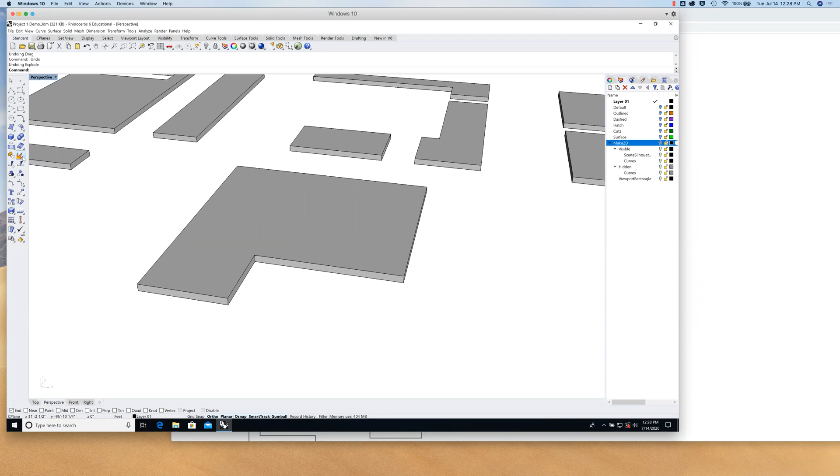And same with the trim and split tool—it works for curves and lines, and it works for surfaces, polysurfaces, and solids. You don't have to worry about that too much at the moment.

To get to one of the questions from before, I need to make a 60-foot by 60-foot cube. There's a number of different ways to do this, but there is a cube tool. I can just make a closed polysurface box—you can see the icon right here, it's the first one.

It asks for the first corner of the base, and I can click anywhere to start—it's just asking for a point. But what I'm going to do is manually enter 0, 0, 0, making the first corner of our base the origin point, our world coordinate axis in our Cartesian coordinate system. When I hit enter, it confirms that point.

For the other corner of the base, I can type in a dimension like 60, 60, 0, giving it a very precise point in space. Making sure I have the right values: 60, 60, 0—an x coordinate, a y coordinate, and a z coordinate.

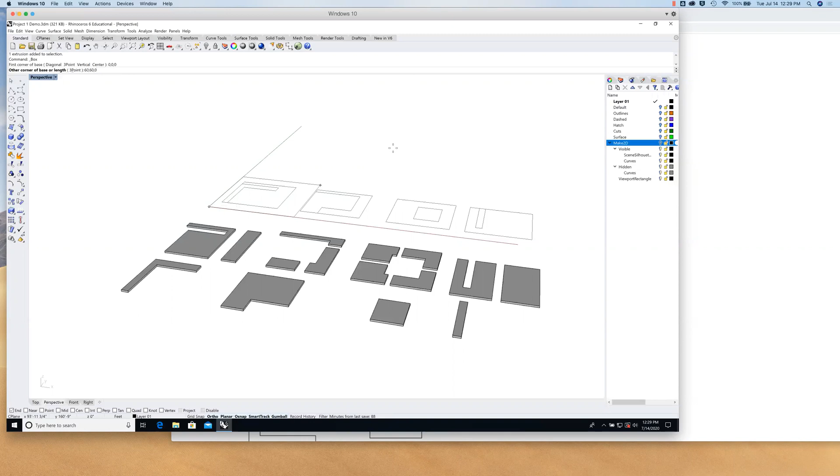Then last, the height, which I can type in as 60 feet. Now I've very precisely modeled a cube, which I think is helpful. And this cube is opaque, which is kind of annoying.

I'm going to go back to my viewport label, perspective. Instead of using shaded, I'm going to go with ghosted, or maybe even X-ray. That way I can sort of see through things, and since they're translucent, it makes it easier to compose things in space.

I'm throwing a lot at you guys in a quick amount of time.

All right, so I'm going to move this off because it's actually overlapping with my line work, but I just wanted to make sure you saw that.

So when you need a point, you can actually just click on your screen, but if you want to be very precise, you can type in X, Y, and Z coordinates to define a point when it asks you for one in the command line.

Okay, so I moved that over, and now it's all about moving, rotating, etc. So all of those geometric transformation tools, most of them anyway, are right here. There's a move icon, and if I click and hold, it brings out a set of transform tools - move, soft edit, copy, rotate 3D, scale 3D, 2D, 1D, mirror. There's several ways you can mirror or reorient objects, do box edits, taper, twist - it's ridiculous how many things there are.

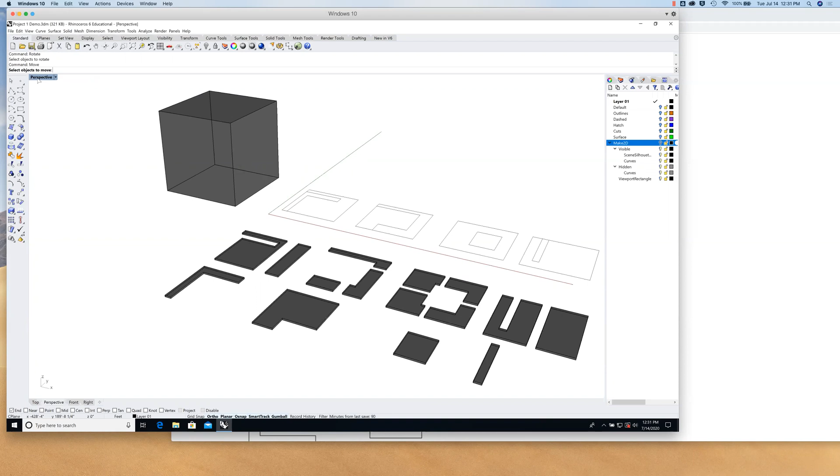I'm just spitballing here. I'm going to go back and forth between my perspective view, my top view, my front view, and right view. And that's really important because I'm going to have to start rotating some of these in space. The easiest way to turn some of these vertical is to rotate them in either front or right view. Okay, so for instance, let's say I want to turn this one vertically.

I'm going to have my ortho on. I'm going to use rotate. I'm going to click here, and I'm going to type in an angle, like 90 degrees, and it's going to rotate 90 degrees in front view. So now it's a vertical thing. Now I might need to also rotate it 90 degrees in plan view.

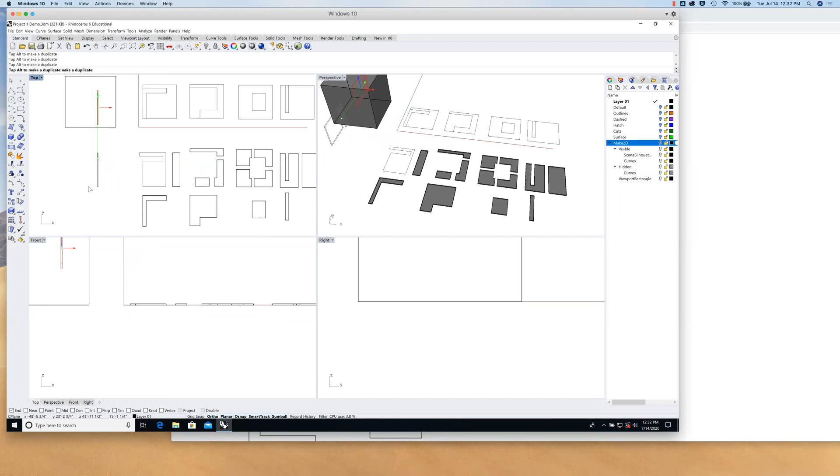But eventually I'm going to move and arrange 12 of these inside of this box. And to do that, I should probably make sure I'm in the orthogonal view. There we go. In order to begin to compose these things, keep in mind that the instructions, the parameters, are all about rotating and putting things together perpendicular to each other, in 90 degree increments.

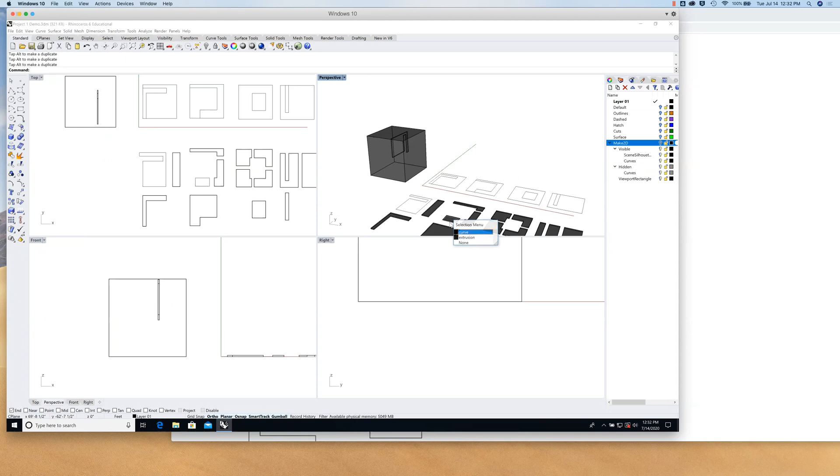So no weird angles, and that'll help you out as well. Also remember, let's say I want to take this piece and move it in there. I can move, and I can use these snaps - so let's say snap to endpoint, let's say I want to make these actually line up and be flush in some way. Let me just zoom in a little further. I'm going to tuck this in.

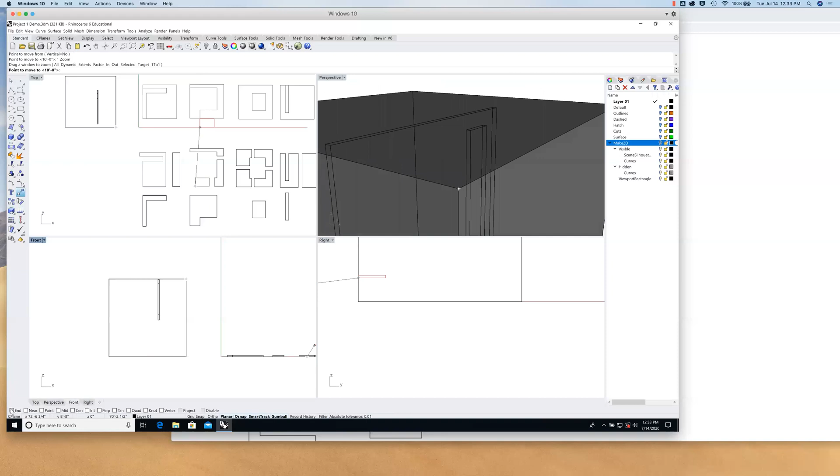Okay, turn off my ortho for a second. And I'm not sure why this is not snapping. Of course. Snaps there - why is it not snapping to the inside here? This always happens when I do this in front of people. It always works fine, except when I'm trying to show somebody how to do it. Just try that again. How strange.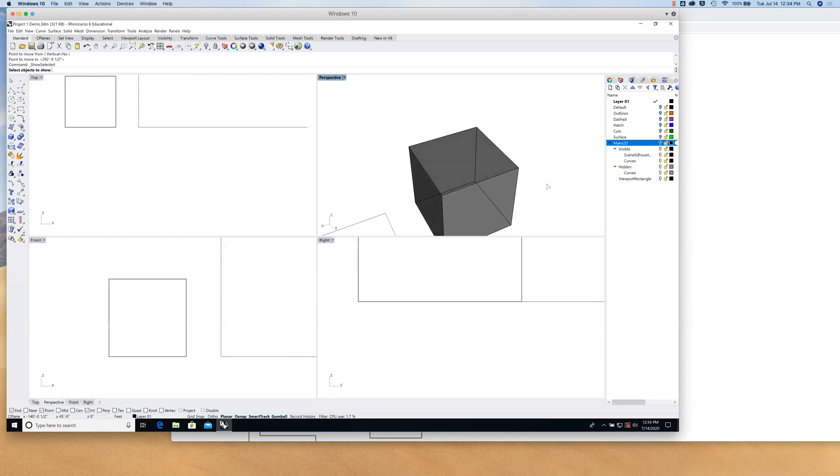Okay, I'm not sure why - it shouldn't be though. I see your question, Isaac, and that's why I hid the solid - because it's like, why is this not? I'm not sure why it didn't. Why it didn't. Why it wouldn't snap? It's really weird. It should snap.

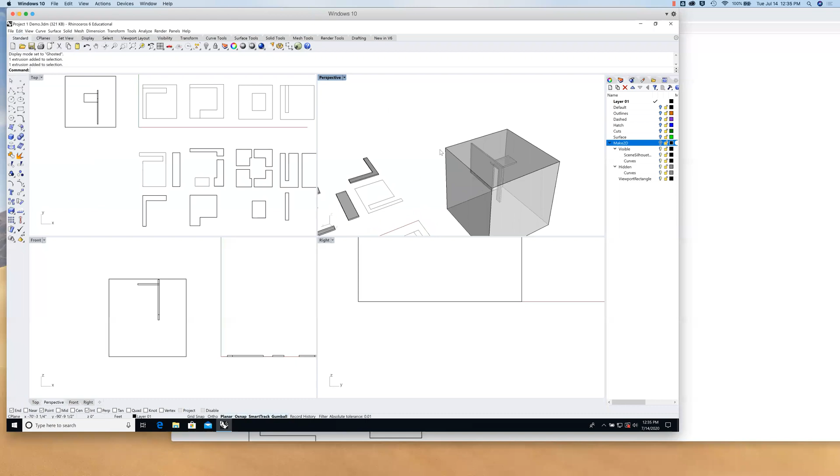Okay, you can always turn this on or off, and that brings up the last thing I'm going to talk about - OSnap. Yeah, that's already toggled on. Snap, grid snap does something different, but OSnap you want.

But the last thing I want to talk about is the layers. Okay, so over here on the right-hand side, if you're opening up Rhino for the first time, there might be a help thing where you select a tool and it gives you tips. But there should be multiple tabs here - one is properties and one is layers. Layers are really helpful. Think about this as pieces of trace paper that can be layered up on top of each other. You can put things on different layers and then turn the layers on and off. For instance, I could put this on its own layer, the 60 by 60 volume, and then turn it on and off when I need to look at it or get it out of the way. Okay, so I can create a new layer.

Let's call this... I'll name this components. You click on this, you can rename it. I'll make this one volume and spell it correctly. There we are. I'll select this volume that I created, go to its properties, and tell it which layer to put it on. So I'll put it on the volume layer. Now I can turn that volume layer on and off as I need it.

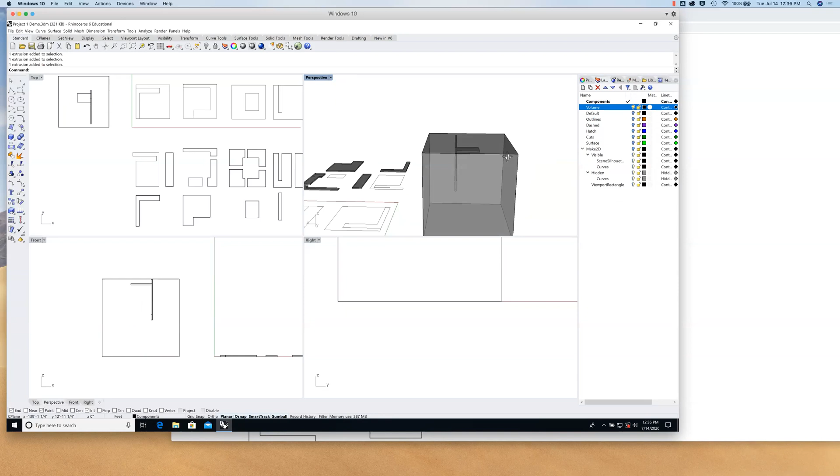Okay, so layer management has something to do with this. And I have more layers than you probably have at the moment because I used this as a demonstration file to generate the diagrams for you guys earlier, with all the hatching and dimensions and things like that.

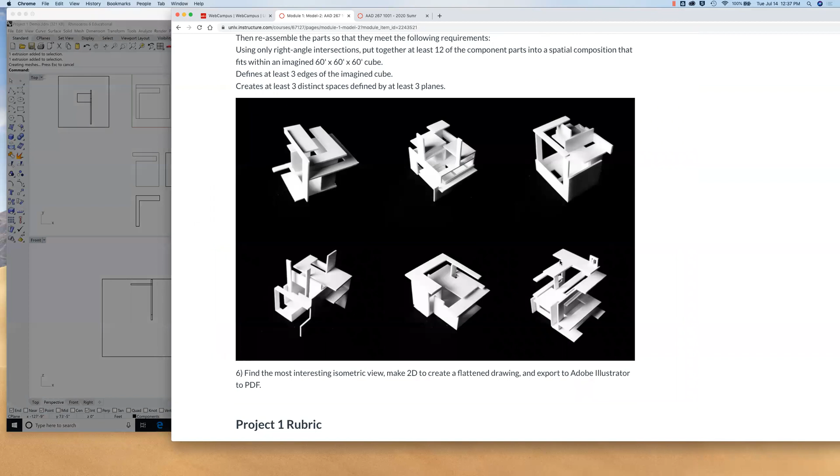But here are some examples from the past that were particularly successful. And here's what you can ask yourself when it comes to the rubric: do I have an ugly side? If so, I need to change that up in order to make it less boring, plain, or ugly. It should have some variety and interest in how the planes are composed and the resulting volumes from any angle.

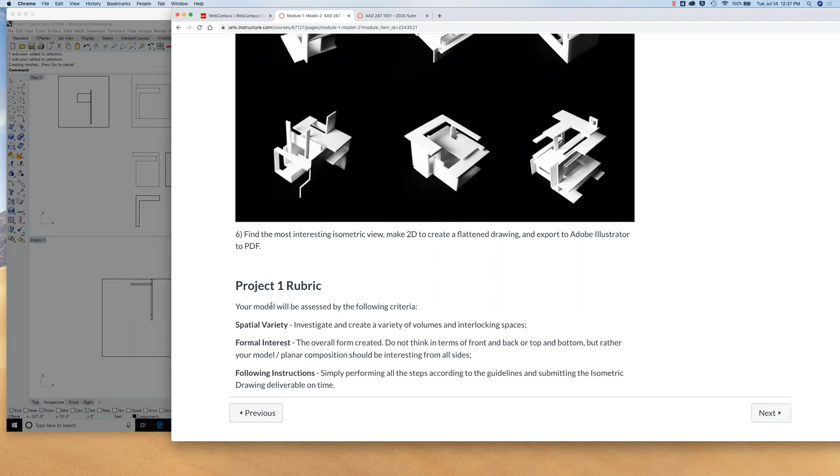Those are the most successful ones. In fact, it'll be interesting to figure out once we turn this into a building which part is the bottom, which one's the top. But we'll get to that later. I don't want you to think about that now. I want you to make a really interesting conceptual model here, just simply composing the planar parts, following the parameters.

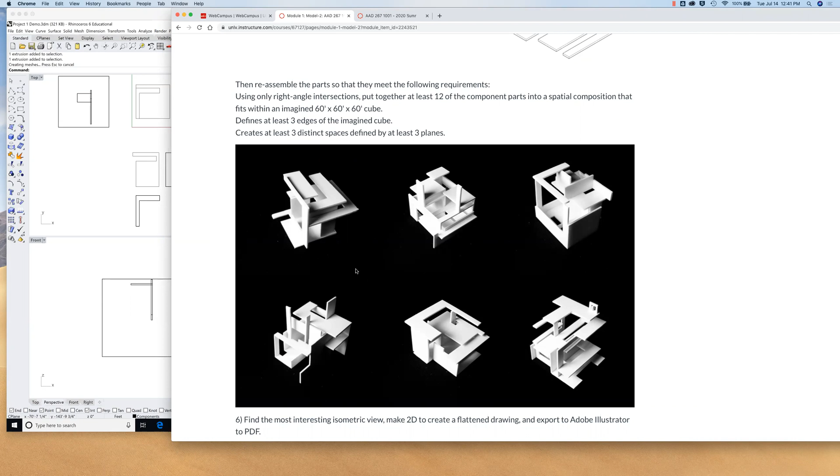So we're talking about the 60 by 60 by 60 cube that we drew, like this sort of envelope, that has edges. You need to be able to define and have something touching one of these edges, at least 3 of these edges in some place. Then you turn this off. This is just a guide to make sure you're not going outside of 60 by 60 by 60, and that you at least touch 1, 2, or 3 of those edges in some way, shape, or form.

But these are the planar components that you're using, the things that you drew and split and then surfaced.

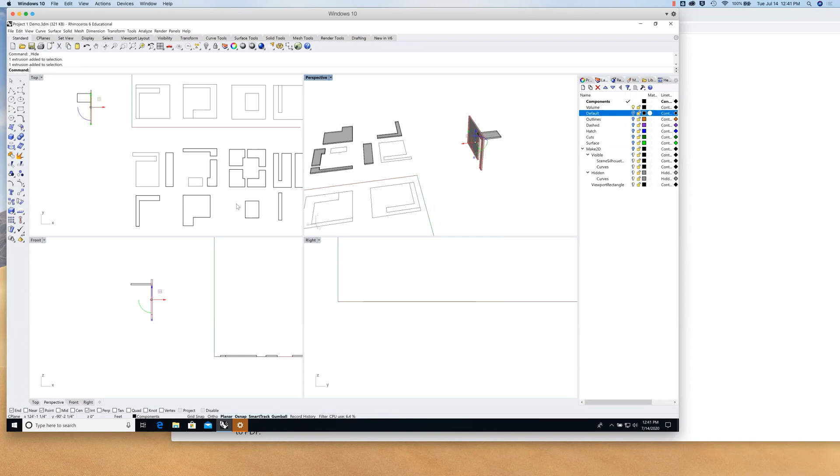So again, follow the steps. Start with rectangles or squares, start to draw the template, then start to split portions of the template. You have these components, turn them into solids, and then arrange them in a way that fits within that 60 by 60 volume.

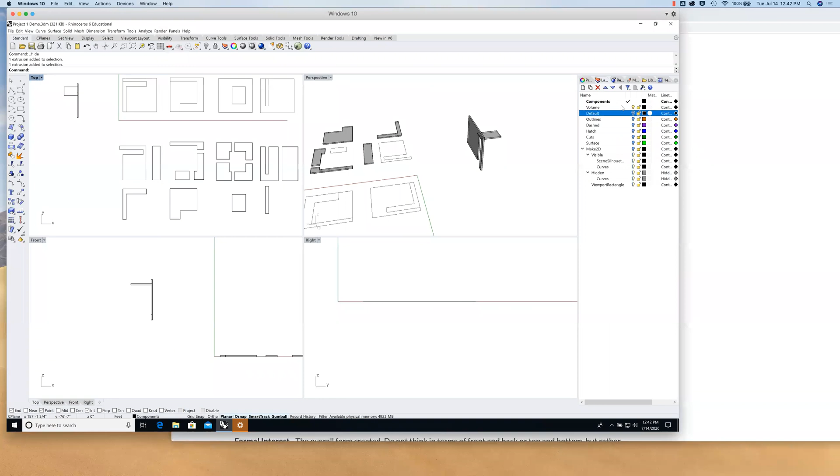Oh great, I put it on its own layer. I'm taking a shortcut and just hiding it back and forth, but I hate using the hide command, so I put it on its own layer and then I can turn the layer on and off. That's what the light bulb on or off does. So if you want to add a layer, go to the Layers tab and hit New Layer. You can select it and type in a new label for the layer so you know what it is. Then you can select this volume that you made, go to its properties, and set a new layer for it, like you can select any of the layers you have, including volume. Then when I turn volume on or off, the cube turns on or off.

The whole lecture will be going up. Like I said, once it's actually uploaded and processed, I try to spend 5 minutes and go through it and time code the different portions of things. So you go into the comments section of the YouTube video, you'll see a menu, like okay we start talking about the syllabus at this time code, and you can click on the time code and it'll take you there in the video. So things about the syllabus, then the project brief, then talking about setting the units, going to the options, setting your ortho and all that stuff. I try to do that.